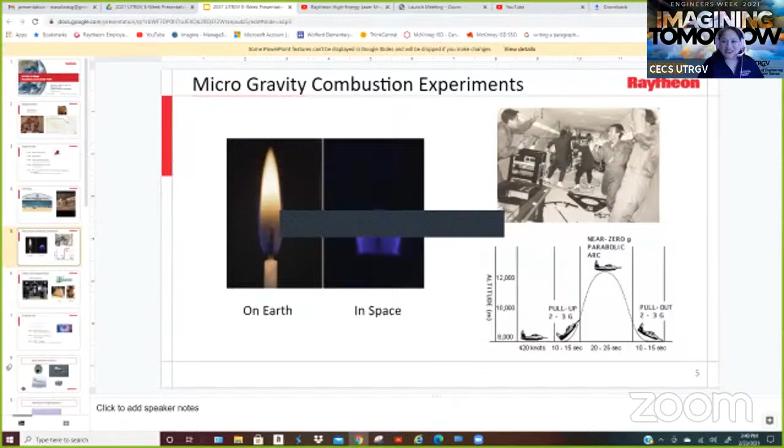I think we might be having some audio difficulties. Mr. Salinas, can you hear us? I'm sorry, I think the audio might be lagging a bit. Apologies for that.

So when you do these experiments on these aircraft, you get about between 20 and 25 seconds of microgravity time.

Apologies, everyone, I think we might have lost Mr. Salinas for one moment, there might be internet issues. Are you there? Yes. You are muted, Dr. Salinas. Yes, oh, how did that happen? Okay, can you still see my screen? Yes, can you close down some of your windows, maybe which you are not using? Maybe sometimes it cuts you off. Okay. Yep, okay, good. Okay.

Sorry to interrupt, can you please share your screen so that you can see those slides? Oh, okay. Looks good. Yes, great, thank you.

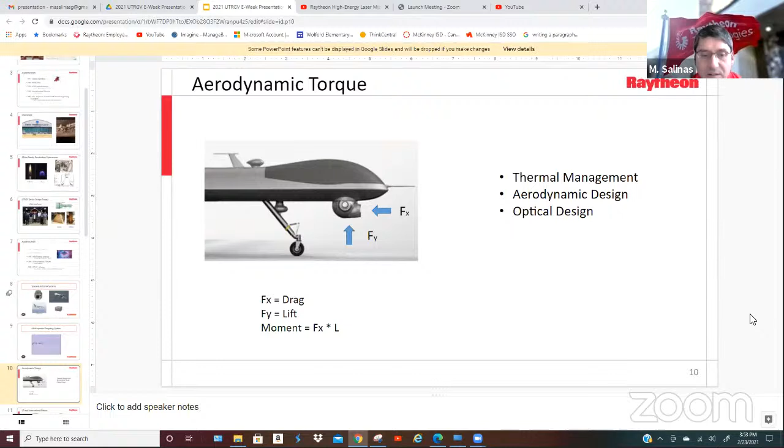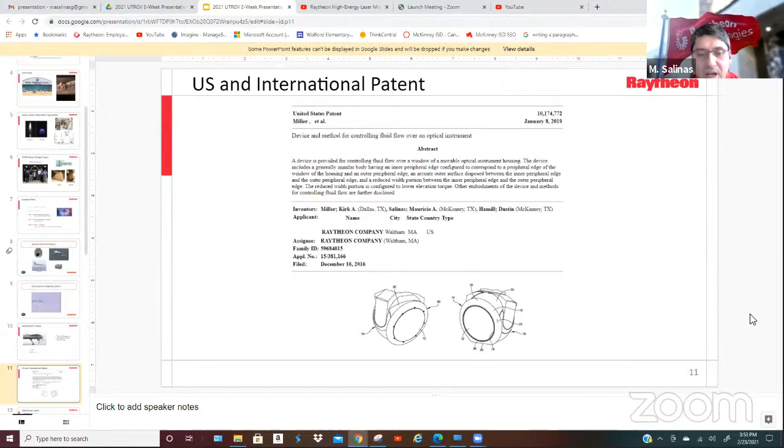A couple of colleagues and I were actually issued a patent on an airfoil that we placed around the front window of these turrets. This greatly reduced the turbulence at the window, allowed the air to stay attached to the window and be laminar, and it greatly improved optical performance. We were issued a patent for that, which I thought was really cool.

Now we're making the problem much harder because we're adding high energy lasers to these turrets. They were high powered before, and now we're adding orders of magnitude of dissipated heat with these lasers. If you're going to use a laser to shoot something down, you need it to be high powered, and a laser is very inefficient. So for every watt of power you're lasing, you're generating 2 or 3 times that amount in waste heat, and you have to figure out what to do with that waste heat.

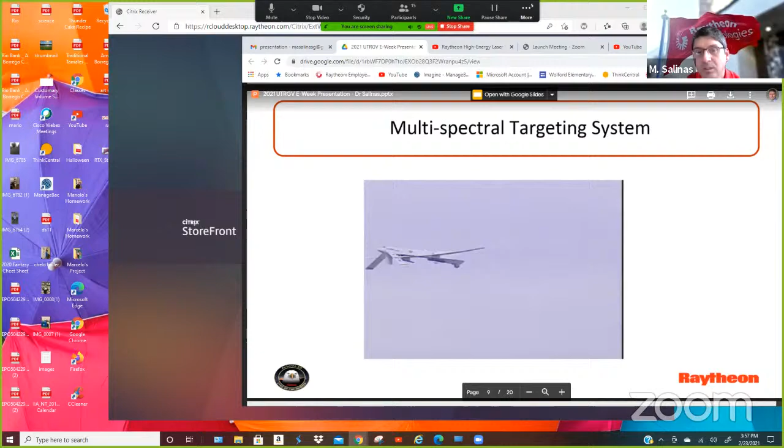So I believe these are very high-powered lasers, like how much power do they have to have for the laser to work? Well, those numbers are classified, but it's high powered. Like high power means how much? Is this 1,000 watts or more than 100 watts? Yes, several kilowatts. Several kilowatts.

So this isn't science fiction, we're actually designing, building, and deploying these laser systems. For a thermal guy like me, it's really awesome because it's very high powered, and you have to do something with all that waste heat. You have to come up with unique solutions to do that. It's basically job security for the rest of my career, and for those of you interested in heat transfer, it's job security for the rest of your career too. It's a very fun and challenging problem we're currently dealing with.

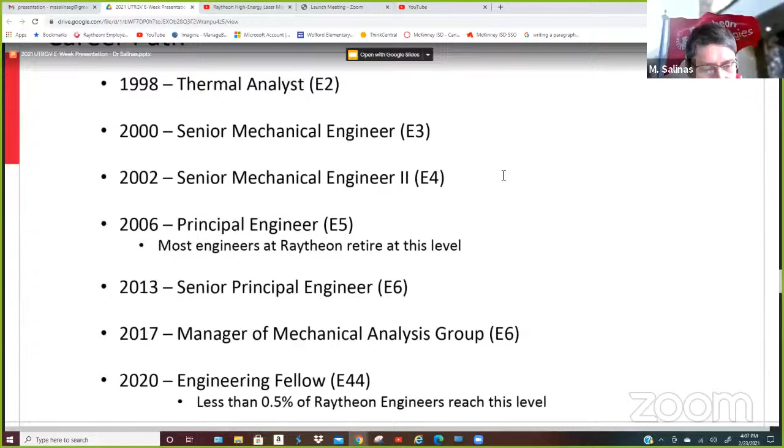Okay, so the next thing I wanted to do was talk about another project I worked on while at Raytheon. This is on the radar side, a radar on a V22 aircraft. A V22 aircraft has rotors that can rotate 90 degrees, so it can fly like a helicopter and also fly like a regular airplane.

They use this aircraft to deploy special operations troops, like Green Berets and Navy SEALs. These are highly specialized troops that go into enemy lines. You usually do this at night, and to keep from being detected by the enemy, you fly really fast and really low. When you get to the drop-off spot, you rotate the rotors, drop down like a helicopter, land, let them all jump off, and then fly up like a helicopter.

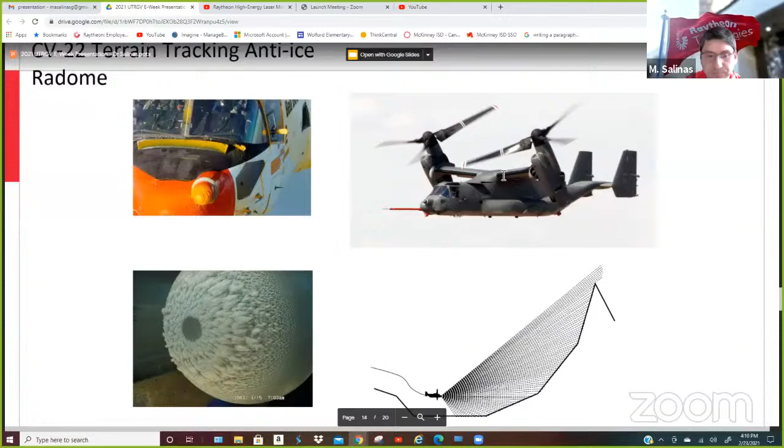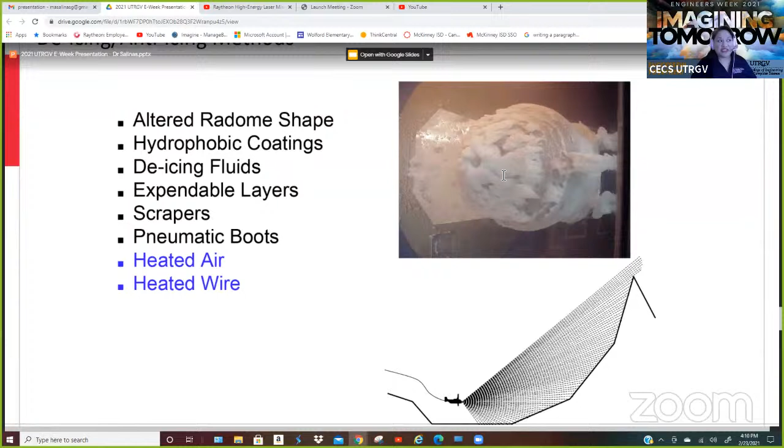We have another question in the chat. They're asking, would it be possible to turn the waste heat into energy using a thermoelectric generator to power surrounding systems? Well, basically a TEC, thermoelectric cooler, can convert—you either have a temperature delta that turns into electrical current, or you can do the opposite: you could have electrical current and convert that into a temperature delta.

You can, but a TEC cooler or a TEC generator is very inefficient, so you would need lots of them. It would take up a lot of volume and a lot of weight. If you were putting this on a Jeep or something, where you could pull a trailer behind you to carry that equipment, it might be possible. But in an airborne system, it'd be pretty difficult because of the volume and weight. That's definitely a good idea though—if you could make those more efficient and lighter, maybe you could apply it. Good question.

So when we're looking at this problem, when we're commissioned to keep ice off of the radome, we looked at a lot of different things. Can we make the radome a certain shape that would keep ice off just by the shape alone? Can we spray it with a hydrophobic coating? We looked at a lot of different things and did a lot of research, and basically decided that the best solution at the time would be to simply heat it up so that ice would not accumulate on it.

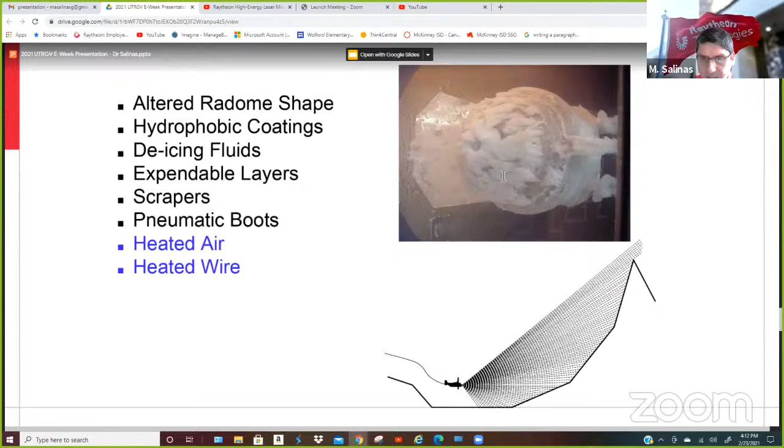So we actually came up with two different methods. One was a heated air method, where you had a dome inside a dome, and we'd flow hot air in between the two domes just to heat up the outer dome. The other method was basically to embed a wire into the radome and heat it up that way.

Now, nobody wanted to do the heated wire solution, because if you stick a wire in front of an antenna, that's the worst thing you could do to it—you're going to dramatically degrade the signal integrity of the antenna by sticking something metallic in front of it. So everybody was rooting against that solution. But we actually overcame it and it worked, which I'll talk about.

So this was our dome-on-dome solution, where you had an inlet manifold and an outlet manifold that basically flooded it with hot air. This was a pretty good solution, but the problem was that it was very hard to get uniform temperature on the entire dome. In order to get a minimum temperature of, say, 5 degrees C on the surface, you really had to pump a lot of airflow through it at a pretty high temperature to get a minimum surface temperature of around 5 degrees C.

It turns out you need a pretty high initial temperature to keep ice off of it, because you have supercooled water particles floating in the atmosphere - water particles at -10, -15 degrees C. It's a pretty unique phenomenon, how can you have water in liquid state at those temperatures? It happens naturally in the atmosphere, called a supercooled water particle. Anytime that water particle comes into contact with anything, it's going to nucleate and freeze instantly.

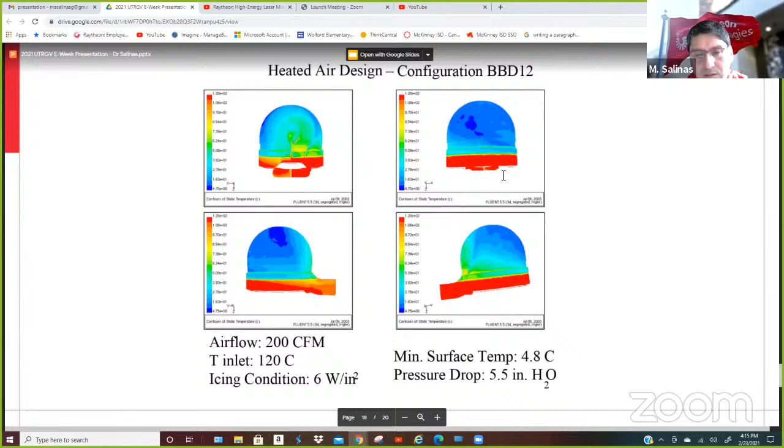So if you're flying and happen to fly into a cloud of these supercooled water particles, you're pretty much going to ice over almost instantly. So you have to have the minimum surface temperature of your radome be hotter than 5C to ensure ice will stay off. This solution was discarded because it was so difficult to maintain that minimum surface temperature due to non-uniformity. So we were kind of forced to go with... oh, am I missing something?

Where is the heated... okay. Well, what we ended up doing was going with the heated wire solution. We could supply enough heat and it was much more uniform temperature. But the biggest problem was how do you deal with the signal degradation of the radar itself?

So if you look at that pattern, the wire pattern and the spacing, it took us about a year of analysis to come up with a pattern and spacing that would minimize the degradation of the radar signal. It was a pretty sophisticated shape and spacing in order to not mess up the radar signal itself.

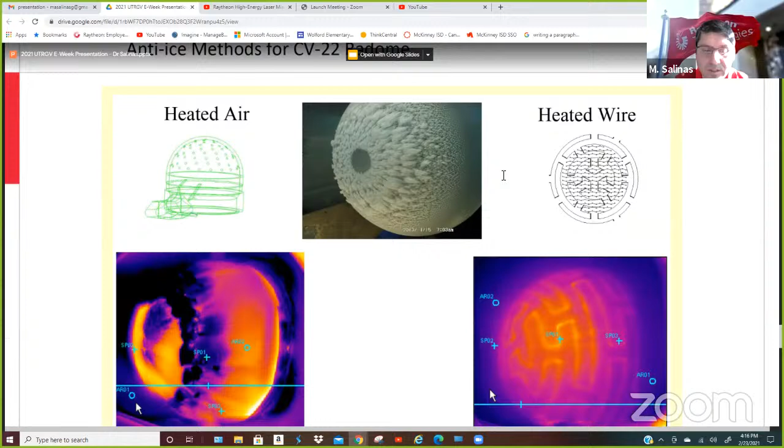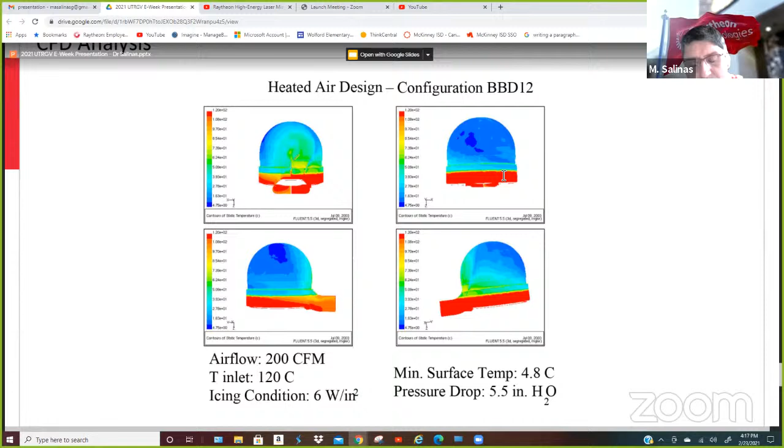So that was another interesting project I worked on. We actually flew it in icing wind tunnels in Ohio and at Boeing in Seattle to test it out, and it actually worked really well. Then we implemented it on an aircraft and flew it in Nova Scotia, Canada during the winter season, and it worked really well there as well.

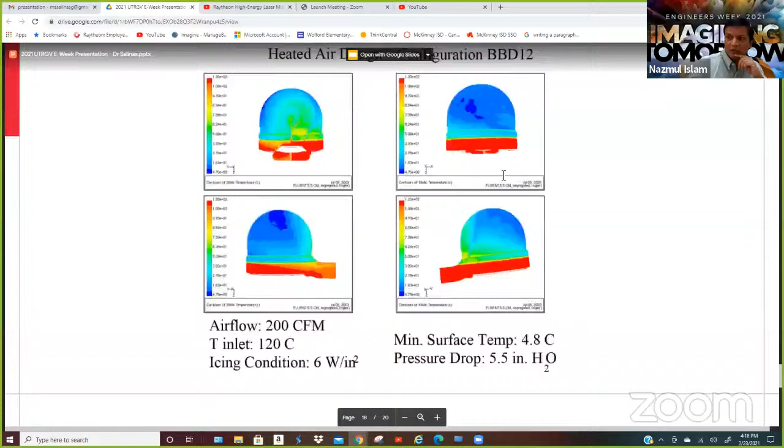So in one of the slides, you are showing the heated air design, and you are showing that inlet, outlet, manifold, attachment ring, and the RF transparent shells. If yes, RF transparent shells - what exactly are those for? Like, so the material is transparent to RF.

How much frequency? Like, what are the RF frequency means, megahertz or gigahertz range? It depends on the radar - we design and develop hundreds of different types of radar, so the answer is yes, all sorts of frequency they can handle. We have a team called the non-metallics team that develops material specifically for each different radar frequency.

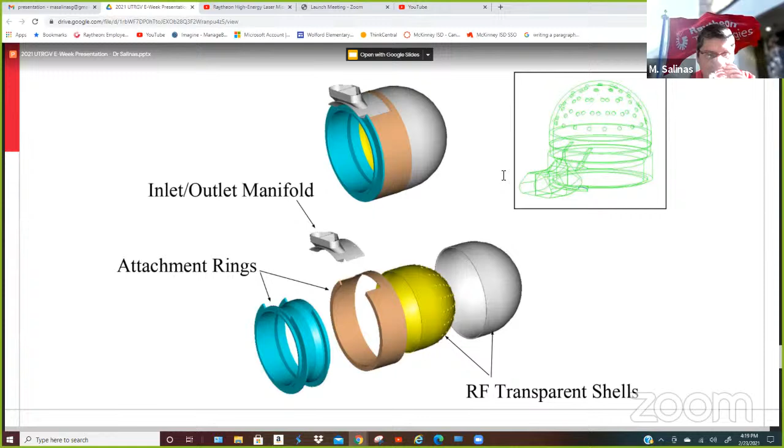We have a follow-up question from our YouTube viewer: how did you do it to gain the 100%? So I'm a thermal guy, right?

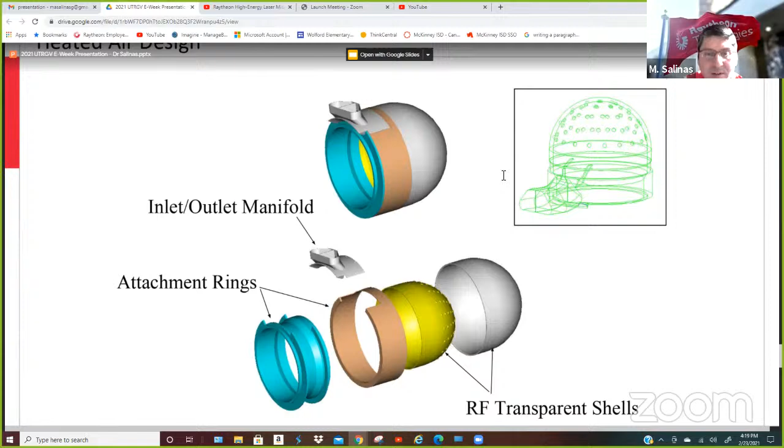So my job was to try to get the wires as close to each other as possible, because the closer they are to each other, the more temperature uniformity you have. But then you have experts on the RF side that were saying, yeah, but the closer the wires are to each other, the more you hurt the signal. So based on the wavelength of the radar, we specifically designed the spacing and shape you see there to minimize the interference - basically working with the wavelength of the signal and using a model to predict the interference. We played with the shape and spacing to minimize the interference.

I was just rooting for the wires to be close to each other, to improve the heat transfer. Go ahead. Oh, apologies, I think they accidentally unmuted. Go ahead.

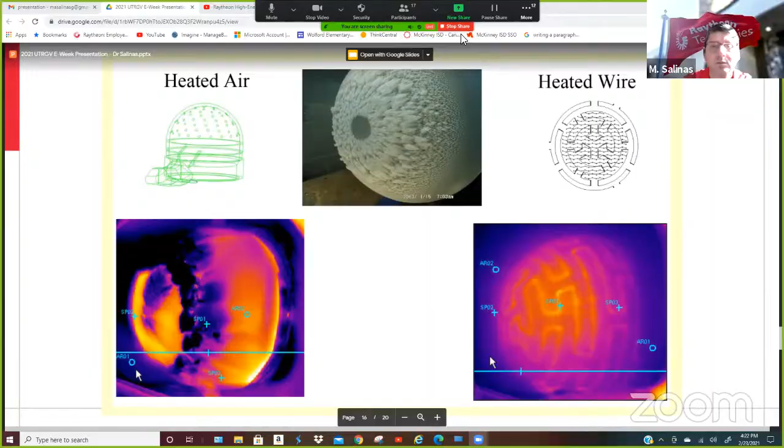Yes, I will tell you that, let me go to - can you see me now? Let me close the window, sorry.

I would say that undergraduate school is pretty difficult. It was difficult for me, undergraduate. As I got into graduate school, I found it easier, because in graduate school you kind of study the things you're interested in. In undergraduate school, you study economics and history and writing and things you're not so much interested in. So I think undergraduate was pretty challenging for me.

The other challenging part was the qualifying exam for the PhD. That was pretty difficult. I failed it the first time, actually. It was pretty tough. That was probably the biggest challenge, the qualifying exam for the doctoral degree.

And the most satisfying part was finishing and defending the dissertation. It was a big weight off my back. I believe it's true for most people who went through that process - qualifying exam, thesis.